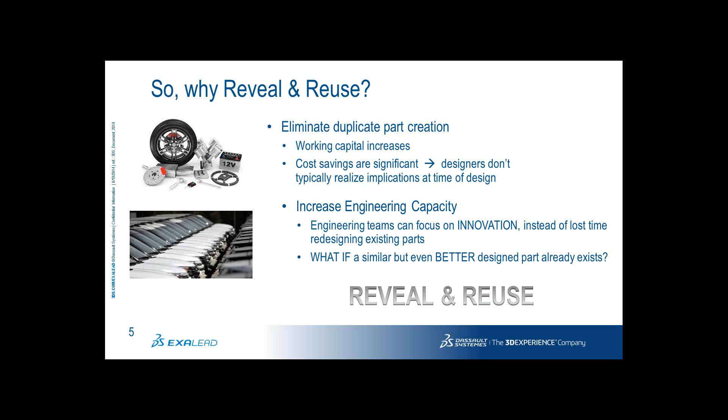So the information discovery challenges around duplicate parts are, we hear constantly that part reuse is a key priority for a lot of our customers, but reusing parts and subsystems is very difficult.

What we hear as a common complaint: if you didn't create the original files, it's very difficult to find them, and a lot of our engineering contacts tell us they feel like Ask.com, as their associates come to them, not only from their own department but from other departments, asking 'Hey, can you help me find the file for these parts, or isn't that just like the other one?'

So in our cost studies, we find that eliminating even 5% of duplicates can be a significant savings for an organization. So we'll talk a little bit more about return on investment for you there.

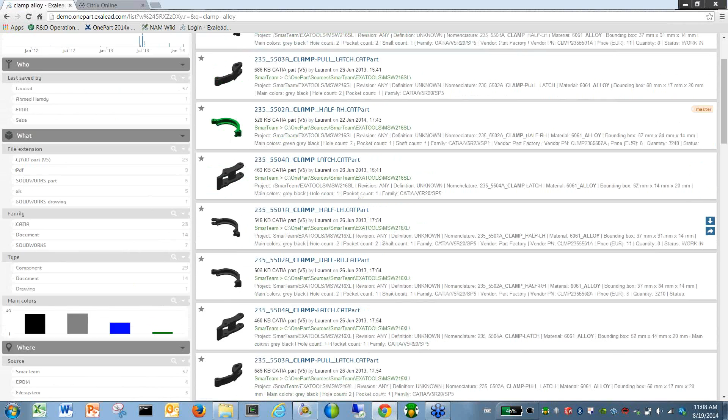So I went from about 20,000 or 12,000 parts down to about 44. I'll just grab this very first part, which happens to be a CATIA part, so I'm going to work with some CATIA things. I can see various information about this particular part, including attributes about it.

We can actually link into other content, so it's not just the part, but it's existing other types of content like the ERP information. So I can see who's the vendor of this part, how much does it cost, is it something that might be in stock? It looks like we don't have any of these in stock right now.

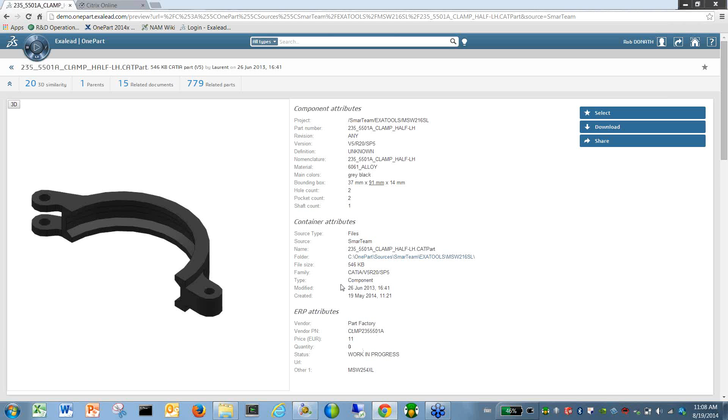I can also see 3D similarity, so I can see that there's lots of other parts. Right here I have 20 different parts that are similar in shape and size, and if I want, I can actually compare these.

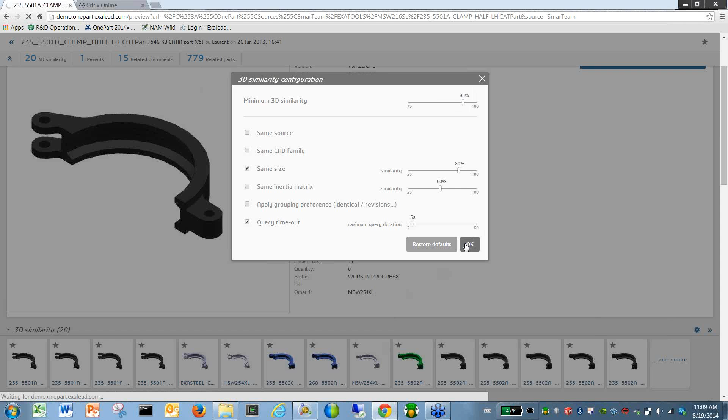But what I might do first is, that's way too many results, so I want to change this and get it closer to similarity. I'm going to change it from 87% to say about 95%, the same size, shape, etc. Now I can limit my results down to something a little bit more manageable, so now I'm down to about 7 or 8 parts.

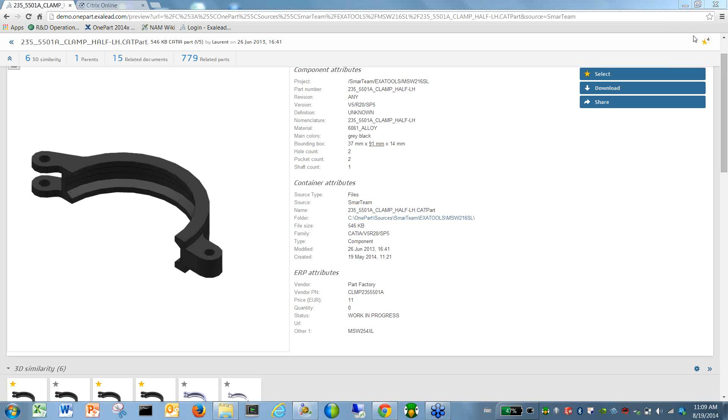So I'm going to select this one as my reference part because it was the first one I picked, and I'll just randomly pick 2 or 3 of these other ones. Now I'll do a side-by-side comparison of these parts. I like to think of this as being on Amazon and shopping for a part. I'm going to move to this view right here where I'm looking at my comparison side by side.

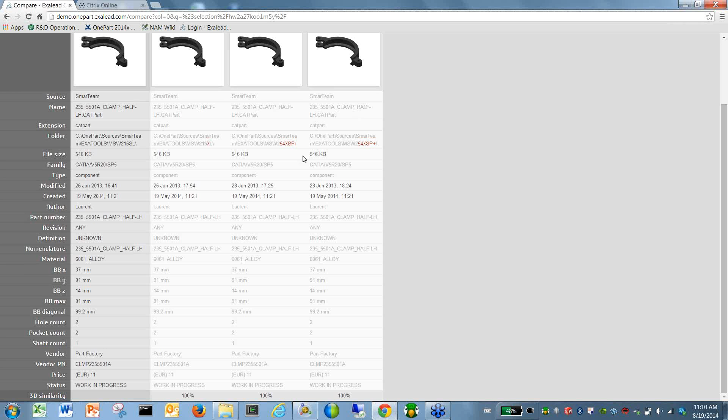And here I can see where these parts are the same or different. These parts happen to be pretty much the exact same part, it looks like. Matter of fact, all of these are 100% the same shape and size and dimensions. They look like they could be the same part, but they appear to be in different folders. So it looks like somebody might have copied this part and moved it into multiple locations.

And then from here, if I want, I can actually go and change some of my other parameters, and we can look at some other parts there. So I'll go back to my other view.

Hi Rob, this is Rich, I did want to take a pause here for a second. You and I were talking about some things about the system yesterday, and one of the things we talked about was the fact that many of our customers were not so naive as to think that CATIA is the only 3D system out there in the world, and many companies are using CATIA in conjunction with other systems such as Inventor or SolidWorks. Can you address what if we wanted to expand that search to other repositories of information? What kind of results would you get there?

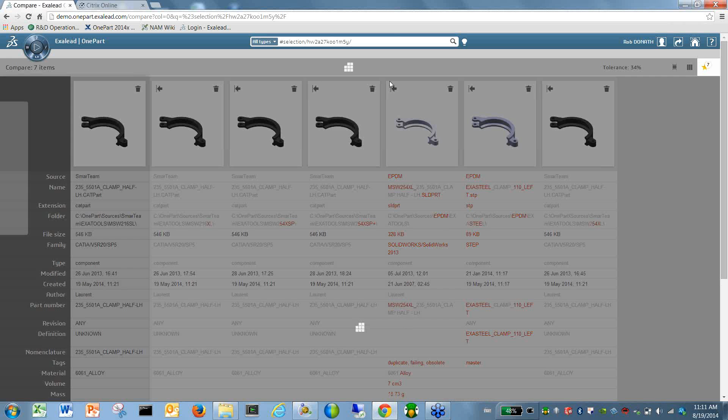Yeah, that's a great question, Rich. Actually, I think when I've gone and done my extra selection here, I may have selected some other parts that are of some different types, so let's just take a quick look at that. I can also explain where we can even drill down and look for certain types of parts, but you can see here about the 5th one turns out to be a SolidWorks assembly or SolidWorks part versus the CATIA.

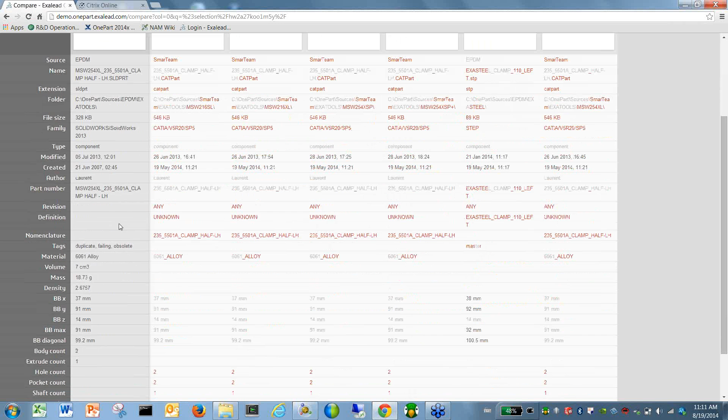I quickly promote that to the beginning point, my reference line, and then all of the other parts will be evaluated against that reference part. I can also do things like look at tagging information, so this one actually is a duplicate, obsoleted part. This one's the master, so now I can quickly determine that this is the part that I really want.

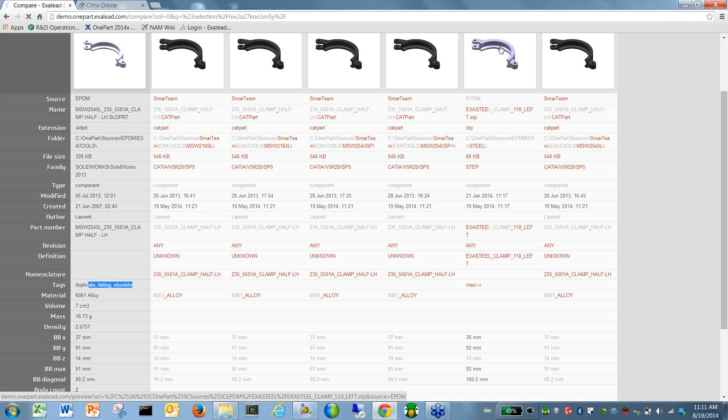Maybe in this particular case, this one happens to be a STEP file, but it could be any other type of part along that line. So the ability to use lots of different kinds of data to select the parts you want.

I'm going to clear my selection and go back to my main list again, and we'll do a part search for something else, but I'll just bring up all the parts again. You can see the system is extremely responsive, and actually this demonstration environment is running on a server over in France. But if it's behind your firewall, you can typically get this thing to respond in sub-second response time in some cases.

And you can see my results here. I had 12,000 different parts. I can take a look at parts that are done over time, who they were created by, what type of parts. You can see here where I might look for all the SolidWorks parts or all the parts that are in AutoCAD format. Or from here, I could actually select it out of this environment.

So you can see here we have PDFs, Word documents, Excel spreadsheets, even zip archives where we're actually indexing every individual file inside the zip, so that when I find a search result, it'll tell me that it's this file and it happens to be in this zip archive or in that directory.

So here I'll do another search for that. We'll do the clamp again, and you'll see how I get type-ahead. Or we'll just do a different one.

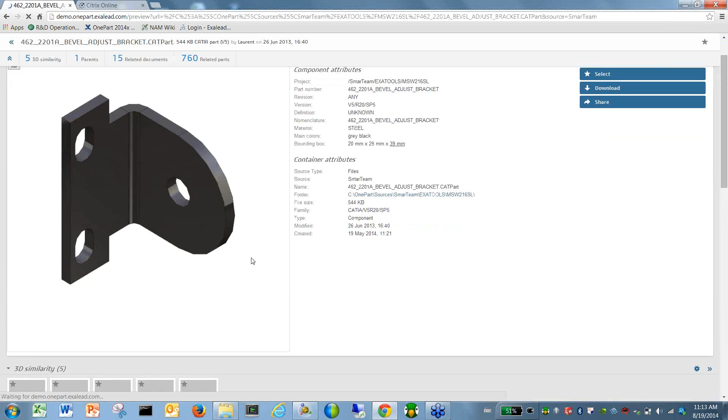Another additional use case is where I've got 3D similarity, and I can actually drill up through the parent-child relationship because we know this bracket has a link from this assembly, and that this assembly is also part of this assembly here. So I'm drilling my way up through the assembly as designed.

Let me minimize my screen a little bit to give you a better view here. You can see where I've got these different children. There's 10 different children here, and where there's a blue number, it tells me there's 2 of these rods or shafts in this assembly, and that I have 6 of these screws and 1 of these screws. If I selected these, I could actually see whether these are 2 different screws, or the same screw with just different part numbers.

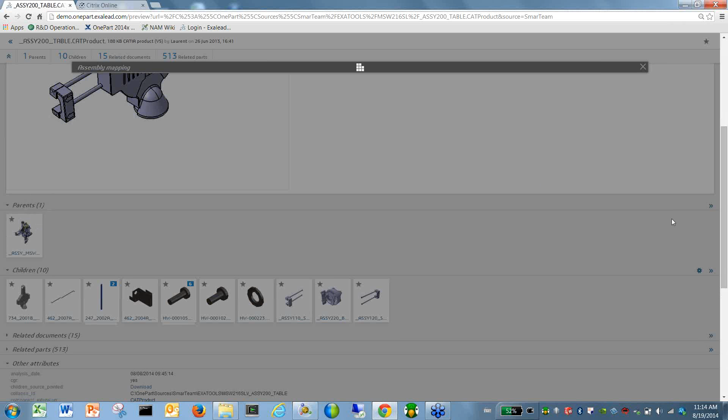We don't have a poll question for this, but I'm fairly certain most clients I've discussed this with, if you go to get an assembly, a lot of times you're not going to be able to actually get the assembly to render because you don't have all the children. And locating the children is a very lengthy, time-consuming process because you have to pick and choose and drill down looking through folders. You may not know exactly where they're located.

And as you can see, because we're indexing content across lots of different data sources, I could see that where the assembly thought the children actually were would have given me all broken links. But I'm able to do different mapping where I can say, I'm going to look in the folder of the pointing document or where the link is. So it looks like somebody grabbed all of the parts and moved them into the assembly directory or library. But I could even index everywhere, including workstations for the engineers, etc.

And as we said, we had the 2 shafts in this part. But you can see here that I've got 5 duplicate copies of that same part located around all of the areas where we've done the indexing. So this is one really good way to determine how much duplication you have, and then how you can clean that up is to take a look at that particular part, get a list of all the different locations, and you can actually share that.

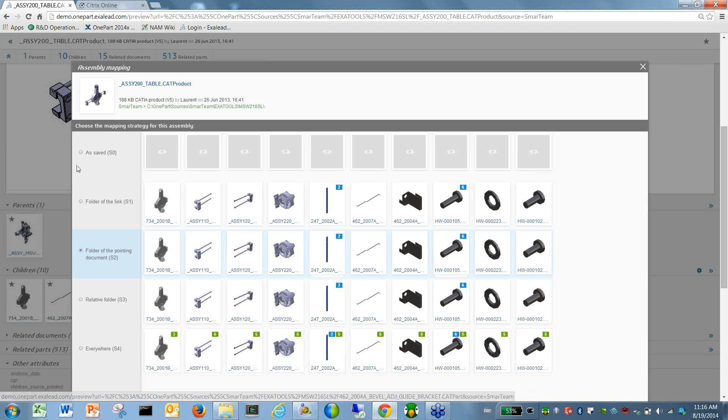So we could take a look at the specific part. I'll just grab this one bracket, and then we can actually create little reports, as it were, sort of on the fly.

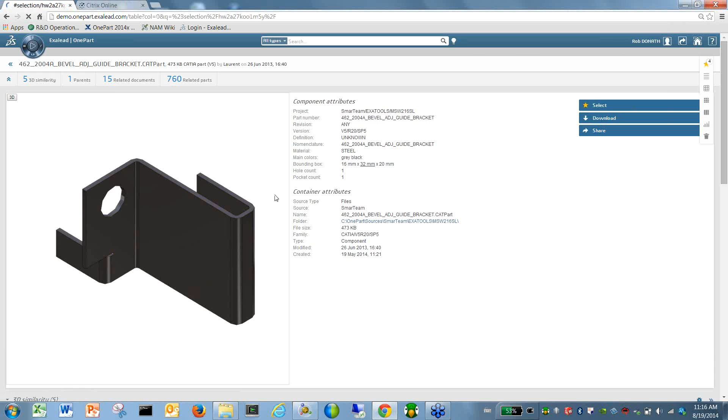I'm going to select this one and a couple of these others to show you how, if these were potentially duplicated parts, I can put this in a table view where I could see all the content together and export it as a CSV file, or share this as a URL to, say, someone in purchasing and say these are really the same parts, but we're getting them from different vendors, or the same vendors with different part numbers, and we should be able to reduce some costs here. It's a quick way to use the tool to isolate and find the part you want, regardless of file format or repository.

You can also look up information against mechanical features, such as a clamp with a certain number of holes, or a bracket with certain plane surfaces or number of tabs. That's a quick overview of how you use the product to isolate and locate the part you need, and evaluate it against other potential parts so you can select the best one for your specific use case.

Okay. Thank you, Rob, that's pretty good. Another thing you and I talked about was you gave us a preview of the analytics available with this, and I see where that may be a value to the engineer, but certainly to their management team as well. Do you have a couple of minutes to go over that for our audience today?

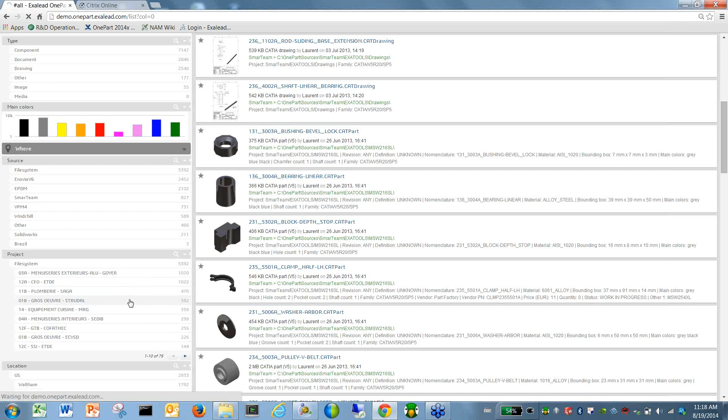Oh sure. I'll go in and use one example where I'll look in the where section of my system, and I may have specific projects. So I'll look at this particular project right here, and this gives me all of the documents created for that project—these happen to be AutoCAD drawings of our Vélizy campus over in France.

And I can go into an analytics view, which gives me some very interesting information. I can see the creation date, so I can see we started this project planning a long time ago when these files started getting created, but the real ramp-up period was during this section of time, so I can see how much time was spent.

If I get to either rebuild, or I've got another potential program or project to build or scope out for a client opportunity, I can go back into the system with information automatically discovered as we index the content, and say it took us X number of weeks to build this, it took X number of people to do this. What kind of pieces were put together? What sorts of documents? Where were they stored? We could have different kinds of tags about that information as we use it over time.

Even things like the quantities—I can see we did this project, here's all the stuff we still have left over from it from a part standpoint for potential reuse. And I can go in and look at mechanical features, materials. What's interesting is that these actually become search result options.

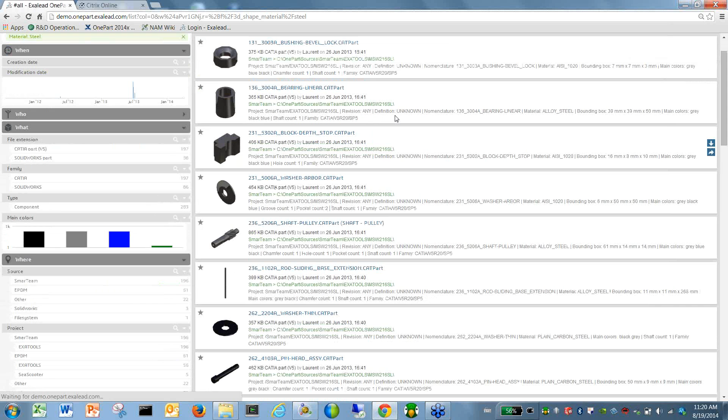That's great, that's what we needed, a brief overview, Rob—that's excellent for our audience. Did you have anything else you need to show at this time?

Yeah, I think the only other thing would be if I wanted to look for something in more detail, because we're also looking for mechanical features. So I'll go back in and look for this bracket, to show that in addition to information you'd normally store inside a PLM or PDM environment, we also extract lots of mechanical information from the drawing. We take the attributes as they're defined within the drawing and call those out as semantic terms, so I can say I want to look for brackets that have one or more holes—I'll go from 44 down to 5.

Or down here I could say I want a bracket that might be of a certain file size, or number of shafts, or chamfer, or number of threads if it was a screw. Or even based on a certain price, so I can have a price range of information I might be looking for. There's lots of different ways we represent the information we automatically extract as we index the content, regardless of where it is or what it is.

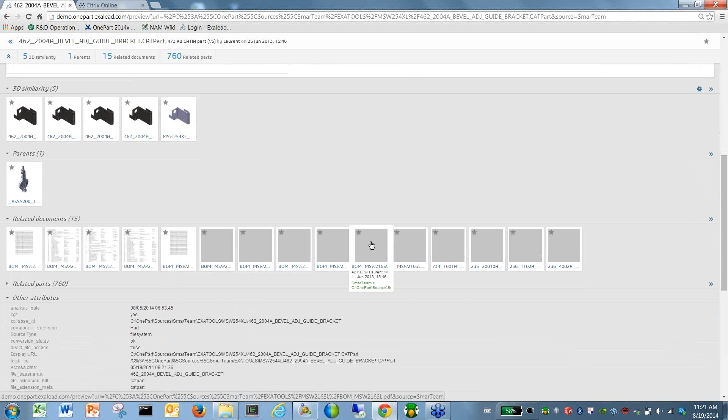And then we can also interrelate that information, so that when I'm looking for a bracket, I not only see the bracket and its 3D similarity and parents, but I can also see related documents—bill of material specifications, simulation file data, engineering change control order documents, or installation instructions on how to put this part into the assembly. All of this is automatically related by the system during indexing.

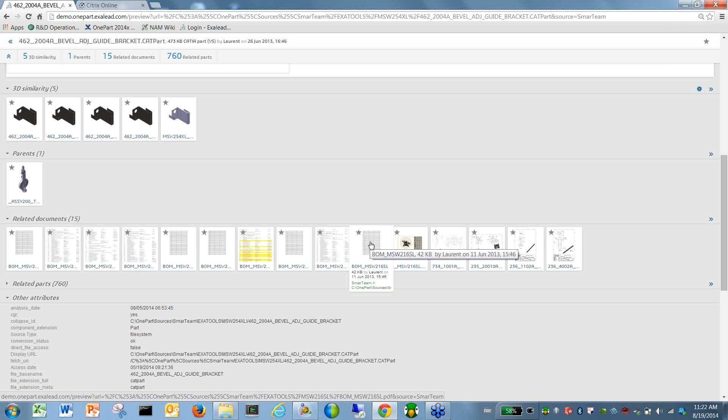I think that's a pretty good quick overview—there's a lot of features and functions I've shown, so we've done this fairly quickly, but hopefully that gives a good idea of what the product can do for you. Given the time allowed, Rob, I think that's excellent. Thank you very much for giving us that overview.

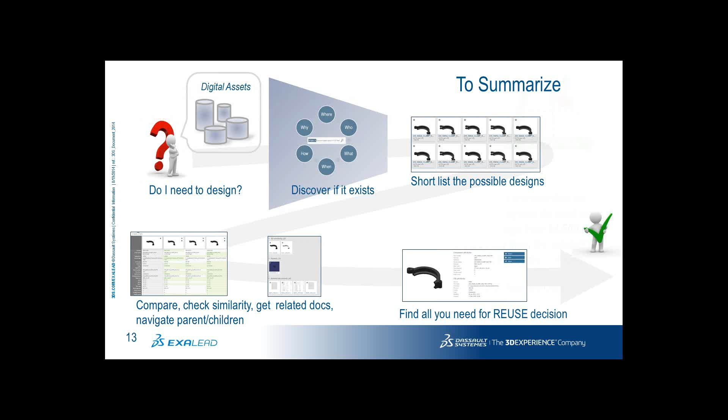In terms of savings, we've got to figure out how to help you afford this software, and we're always looking for that return on investment for our customers. We have hard savings, such as reduced stock, reduced potential cost of poor quality, and increased engineering capacity, as well as some soft costs. We'll talk about that in an example here shortly.

Some of the other significant costs incurred in duplicate parts are in vendor selection, quality assurance, performance validation, and documentation. All these add up to quite a bit of cost for an organization with duplicate parts, and we will make a compelling story to incorporate Exalead OnePart for your business.

Here's a short example about an international machine tool supplier that had over 64,000 existing part numbers, and during any given year they were creating about 5,000 new parts. When they did a study, they found that about 1% of those 5,000 parts were duplicates, meaning they were duplicating 50 parts per year.

Doesn't sound like a lot until you start rolling up all the costs. A new part number for them, taken end to end in their business, cost about $4,500, which over 50 parts per year became a $225,000 a year problem for them.

So we implemented the OnePart from Exalead, and for 10 engineers, the cost of the software is about $18,000. So we got a real nice savings in that scenario.

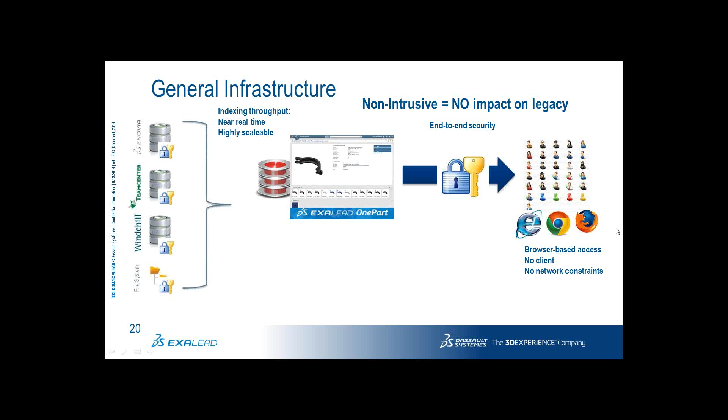So this brings us pretty close to the end. I think that covers just about everything we have here. We've covered the last polling question. I did want to go over again the OnePart example for the international machine tool supplier, because I think this is a fairly short investment of time to find out the value of Exalead OnePart to you.

We had significant savings in this real-life customer. We'd like to have our sales team get with you and your team, get some information, and prepare this. It really requires just a little bit of time on your part, and we could turn that around in a day or two to give you an idea of the potential savings for your organization.